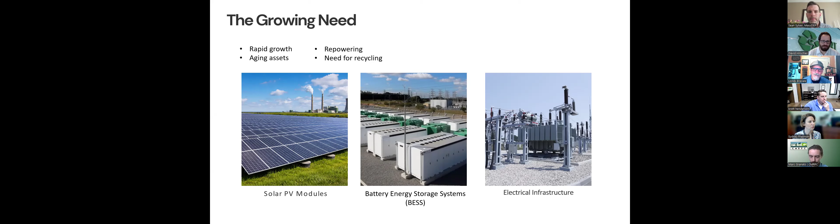Okay, so we do have some challenges with the renewable energy life cycle. Now renewable energy, of course, gets into batteries, wind, solar, the whole bit. But here we're looking at new construction, damaged material, repowers, and decommissioning. The farms do have some maintenance that has to take place, and we get damaged panels from storms, accidents, and that sort of thing. So with the expanding growth of the industry, there's a lot of moving parts. Some are getting upfitted with new, better performing panels, and the other ones, even though they're still working, there could be a home for the ones that are still working.

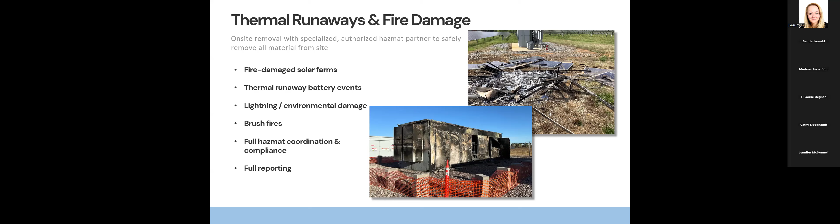So that's one of the things I like to mention, because it's not an everyday occurrence, but when it happens, you have to act quickly. We are in a position where the site owner or whoever's running the maintenance doesn't have to find someone to do it. It's built into the system we already have. So we're handling everything on that site.

We have specialized expertise for not just the panels, but like I say, the damaged goods, the information that we get from the project manager or the site manager. We take this initial intake call. Every site's a little different, and we like to take the overall assessment of what they're trying to accomplish, what's going on there, and if any of these events happen between now and then, we can act promptly, and it works really well - no one's scrambling.

We just act. We have an extensive network for processing too. We have nationwide coverage, also with our partners and downstream partners for the finishing end of some of the material - they have to reprocess it. Nationwide logistics that we handle. One throat to choke - once we get the request in, we handle all of it.

All you got to do is approve the paperwork and we're ready to go. So we'll do the coordination of the material movement, palletizing, banding, wrapping, loading the trucks. We can do everything on the site. In other words, we'll do as much or as little as the site needs. It really depends on what we're doing.

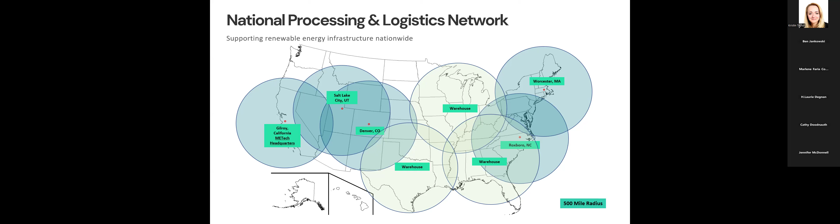So with that, we've got our local trucks that we could use as well. For the larger projects, we like to use the flatbed, so we get that with our partners, but third party. We've got agreements across the country to work with third party logistics if it's not going to be our trucks. And again, any partner we may use, if it's not our own, they have to be vetted out, screened, and approved. So we don't just work with anyone because of our certifications and the things we like to document.

On the solar farm, we recover the materials from the modules themselves, including the glass, aluminum frame, silicon, and any other valuable metals inside those, plus the battery energy storage units. Some are small, some are very large. I did a decent sized job in Texas — the units were about 38,000 pounds each, and we had 19 of them. It's a lot to move. It's a big site.

Inverters, switch gears — electrical control systems — we recover the metal, the plastics, and any other pieces. We separate all the material and break it down to a commodity at that point for reuse once it gets shredded or processed.

Transformers, electrical equipment — again recovering copper, aluminum, steel, and managing any potential fluids that could be in there, like cooling fluids and things like this.

Copper cabling — we want to recover high value copper and all this material, which we base on the market value of the day, which fluctuates as everyone knows. Those credits are due back to that site after we determine what that is, which is kind of cool if you're doing a repower situation. So you have some costs of processing solar panels, but you'll have credits for other goods like copper and equipment with more value. It's good to have a blend of both.

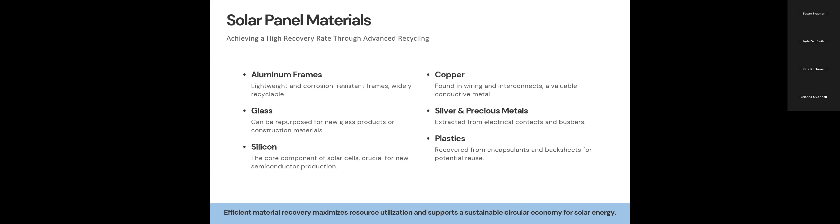So all of it is going to be separated out, and that's part of our processing — all our facilities can do that. Here's kind of a quick breakdown.

We'll do the initial intake and grading of the panels, and a lot of times we'll know this in advance. They'll say, hey, these are all broken, they're cracked, we've got 5,000 of these things, we're just going to get rid of them. Great, now we know exactly what to do. If they're unsure, we will let them know, but in a lot of cases, they are broken.

Once the material is received, each lot gets photographed and weighed, and we document everything from the first foot we're on site to the very end. Everything is documented and recorded. We put it in a portal that you have access to, to watch the process and download all of the documentation that follows it.

So we'll do the grading, dismantling of the aluminum frame, which goes through another process to take the glass and the silicon out. The junction box — all of it gets removed. The glass gets shredded into much more manageable components for more weight.

All those pieces end up getting separated out, and we're looking at the cleanest commodity for recovery. That's using everything — nothing going into a landfill. So everything is going to be reused in some way from that processing breakdown.

Field services — as I mentioned earlier, we will do as much or as little as needed on the site. We could do on-site labor, palletizing, banding, wrapping, using our labor and equipment, loading the flatbeds, and then going to the closest METech facility, or coordinating with current labor that's there. Sometimes we go to a site and there's nobody there — we have access to it and have to do all of it. It just depends on the situation.

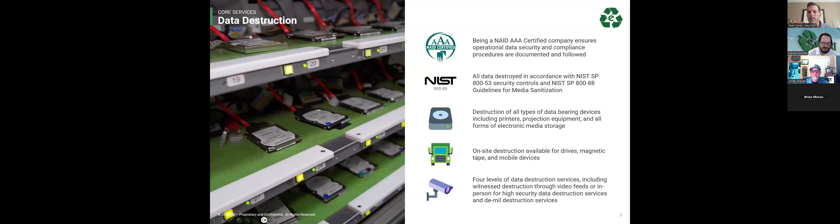So generally what we're doing is ITAD services for devices, batteries, solar panels, as we talked about, and then we're also very heavy in the EPR and ARF space on the legislative compliance side. So data security for hard drives is a big part. I'm just jumping through a background of who we are.

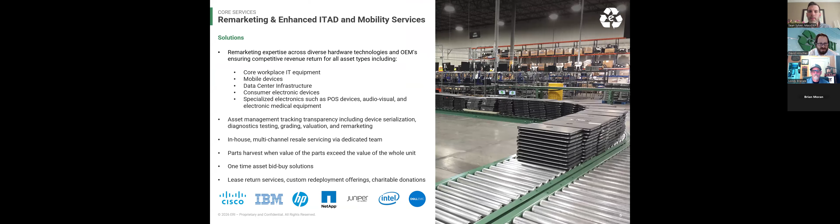This is obviously not the solar panel portion. Here is our reuse testing side of the business, where we're looking for assets to be able to put back out into the market. We do use this area for panel testing as well. As Londi said, there is some potential reuse out there for panels, either they're replaced before their end of life for more efficient versions, or they still have enough power that can be used for alternative services. So we would fully test those devices in our ITAD spaces, and then we are processing material down to commodities as well.

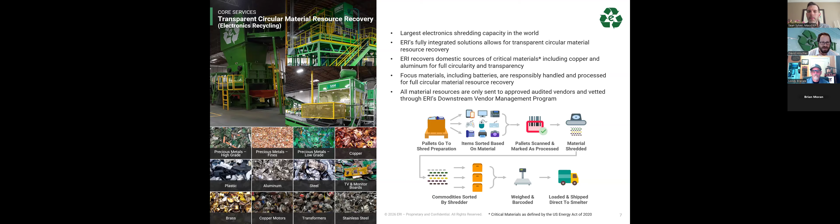So in terms of panels, a lot of this is pretty repetitive. Mostly what we're doing is a lot of the work is on the decommissioning side of things. So unlike smaller electronics, panels tend to be installed. They're very large, and they require a lot of manual disassembly. And so most of our panel work is going to include that decommission side of things, and then the moving of these large materials to our facilities.

Also, a similar reporting system. We want to make sure that everything that comes in and out of our doors from customers is reported and tracked and available for everybody as well. And then we have custom reports down to the asset level as well on that end.

So with solar panels, as I talked about, we're pretty heavily involved in EPR and other regulations. There has been a bit of a push to grow EPR for solar panels with limited success. The industry has been pretty adamantly opposed to solar panel EPR, and therefore have sort of threatened to leave states that have EPR in place. So in Washington State, for example, they have the first full EPR program, and that continues to get delayed.

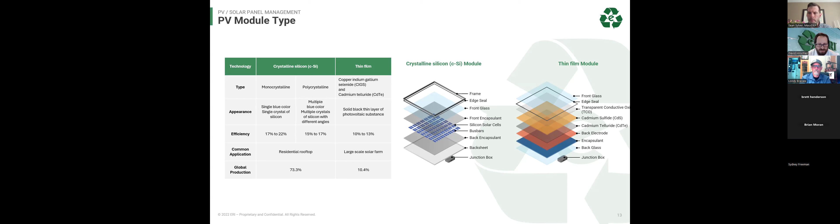It's now the cheapest way to install new energy. So when we talk about the end of life of panels, there are a few sources. One is simply that these materials are reaching end of life. The other is that there's about a 10% breakage rate with new installations, and that seems to be growing because the panels are getting larger and thinner, making them more brittle and increasing the risk of breakage.

So we're seeing both older panels as well as a lot of newer panels coming through the door as well.

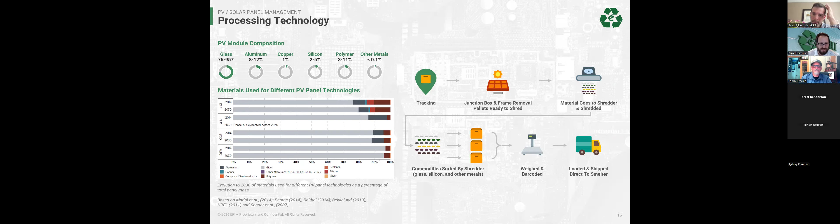Again, mostly what we're doing is on-site, supporting the actual movement of the material. That's going to be by far the biggest cost and challenge, since these are very bulky, custom-sized items. Because there's good reuse value for some of these items, we want to make sure they're packaged safely. They're also much easier to process when there's no breakage, so that's a key part of the process.

As Londi said, we're handling everything, not just the panels themselves, but the junction boxes, the ESS storage, etc. All of that is handled separately and then processed, with the aluminum and the silicon wafer being the most important areas there.

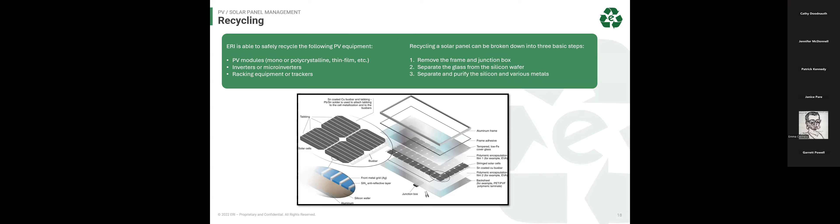Tracking individual panels by make and model for potential resale is a big portion of what we're trying to do. There are markets out there, though not always domestic, so there's a need to make sure we're properly testing those panels to confirm they're fully functional before they leave.

The goal is, in places where a manufacturer is working with us to eliminate their old excess panels, or other areas where panels are essentially good as new, we're trying to track the individual make, model, and serial number, and fully test those devices so we can make sure they're functional.

Just based on some of the questions in the chat before, I want to talk about glass processing. As I said, the glass is the biggest challenge with panels. We're in conversations with a few different manufacturers trying to develop glass-to-glass recycling, because most of the glass is currently going into the construction industry.

There's some antimony and other additives in the glass that make it impractical to use similar processes to bottle recycling. But if we can get the panel glass in good enough shape, not broken, there are manufacturers starting to evaluate processes and products for glass-to-glass remanufacturing. That's been a big push lately, and we've been working with some national labs to figure out better solutions for that.

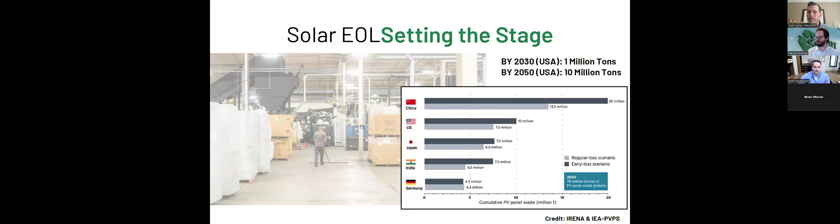So, solar end of life, setting the stage here. IRENA stated, in a report that's a few years old, that by 2030 there'll be about 1 million tons of solar panels hitting end of life in the US, and by 2050 that will turn to 10 million tons. We actually estimate at SPR that those numbers will be slightly bigger. What we've seen entering our recycling facilities in Texas, North Carolina, and Georgia are panels that are roughly at an 11-year life cycle. There's really 4 buckets that modules will hit end of life.

First and foremost, most manufacturers have a 25 to 30-year expected panel life, which many very well could reach. But what speeds that up is a repower or tech upgrade, similar to if your IT department is going to issue new laptops throughout the business, even though those old laptops are working, there's a need for a tech upgrade. So what we're seeing is a lot of early generation farms might only have about 200-watt panels installed. Now you could go to market and get 6, 7, and even 800-watt panels at a 4 times multiplier. So it ultimately pencils out to do this refresh.

You have weather events that could have a panel go from 1 year anywhere to 30. That weather event could occur. We've handled quite a bit of weather events. Unfortunately, Hurricane Helene spawned quite a bit of tornadoes in the southeast, which we've done a good bit of cleanups from. You'll also just see regular events such as a hailstorm or even a windstorm that could actually bow the panels, allowing these to hit end of life early.

And then obviously you have your transportation and construction breakage. Similar to if you were to install new tiles in your kitchen, you're always expected to buy just a little bit more because there'll be some breakage in transportation of these solar panels and breakage as they're being constructed.

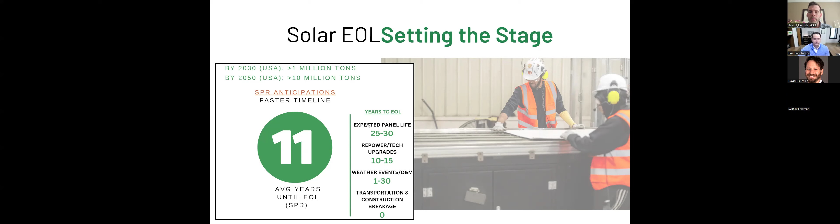Decom and repowers was a small percentage of that in our early years. Weather events and O&M breakage is the other part that rounds it out. I did forget that other bucket on the previous slide - operations and maintenance breakage. There's all sorts of events that could cause a panel to hit end of life while it's operating. Things such as a junction box failing, something quite literally falling out of the sky. We've had those events - when they're mowing a solar farm, rocks could hit up. So there's just a laundry list of reasons why a panel could break while it's in operation.

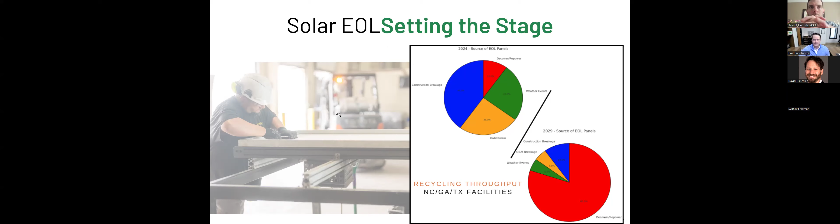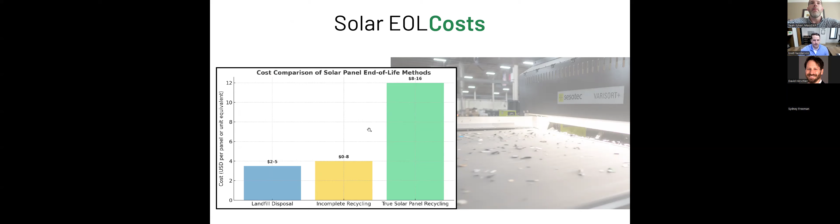So, cost: landfill disposal, depending on the region and market you're in, that could be a little bit higher, maybe even slightly lower, depending on local landfill cost, but roughly $2 to $5. Incomplete recycling, which we'll talk about in a little bit, could be anywhere from $0, where someone's willing to just take the panels for free, up to $8. And then true solar panel recycling, which is the sustainable method of handling volume, scale, and regulations, is roughly $8 to $16 a panel. That's including transportation.

What we've seen here at SPR in the last 36 months, our costs to our nationwide client base have decreased roughly about 42%. There's a myriad of reasons for that. First and foremost is technology advances.

What that could do is not only speed up the solar panel recycling process, but it'll also help recover cleaner commodities, which opens up new markets and new supply chains. We'll talk supply chain a little bit at the tail end of this presentation.

Your economies of scale are still something that's quite realized in this industry. When you have consistent throughput, that helps open up different off-takers and consumers of your recycled material when they know they have a consistent supply.

And then the largest cost really in this whole solar panel recycling side is going to be transportation. So regional facilities that are actually processing panels on site offer much lower transportation costs from solar site to recycler. We've seen in the industry a lot of lay down yards or just storage warehouses, but that transportation still has to ultimately end up to a recycling facility where they're being recycled. So the more you could shorten that distance, not only is there major CO2 savings, but those same costs to get those 1 million panels on the solar site also have those same costs of freight to come off site.

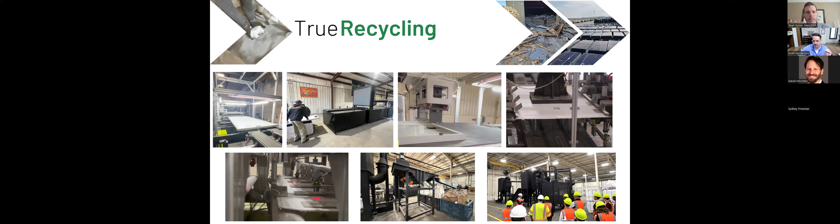On the mechanical side of things, the glass will be shaved off without actually breaking the encapsulant and grabbing the silicon. We do on-site sizing, crushing, and reducing and screening, so it could go into a myriad of different glass markets. In the back end, we are using technology such as electrostatic technology to pull out the copper granule and other metals, as well as density separation to pull out silicon and plastics.

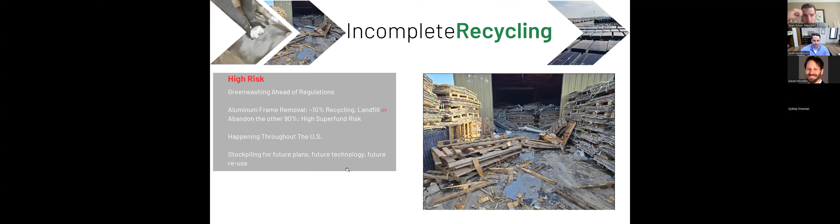Reuse markets. So again, there is reuse markets. We've recycled a million plus panels. Probably a few thousand of those have entered reuse markets, but they're quite limited. We have a white paper, our circularity analysis wrote it. If anyone wants to reach out, we could share it with you.

On the issues of taking solar panels in volume and putting them back into the grid, not only in the United States, but abroad, there's a lot of interconnectivity legislation on a used panel. So for example, in the US, once that panel's used, the UL rating is no longer valid. So it's going to be quite challenging to connect to the grid without that type of validation.

There's also all sorts of issues that go into doing this in bulk. It slows down the installation quite a bit. They have to be protected. More packaging materials are needed. Testing is very in-depth. We have to do flash testing, micro and fracture testing, and high voltage leakage testing.

So what we're seeing, unfortunately, is a lot of overseas dumping that we saw early in the e-waste industry, where someone could load up full containers of panels, send it overseas, and then they're ultimately trying to get that value in aluminum, with the rest ultimately being landfilled.

So the composition of the panels kind of gives you that perfect recipe that we saw on CRT monitors several decades ago. The bulk of it's glass. A single-sided panel could be 65 to 75% glass. A bifacial panel is typically around 80% glass. Then you have aluminum, silicon, and plastic.

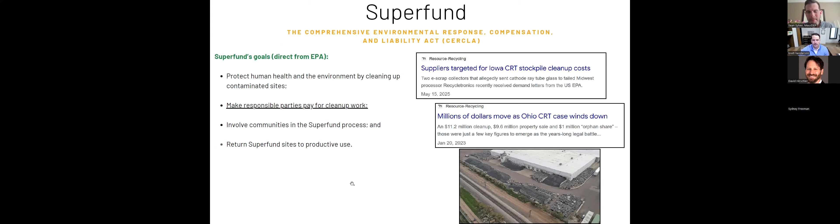And again, it is all about the glass. This is ultimately a glass recycling game, so it's highly technical and requires established relationships. For example, one of our biggest glass off-takers, it took several months of lab testing back and forth, contracting on and getting the exact size that could be used. When they bring it in, they have to do different EPA and air testing.

So there's quite a bit that goes on before that manufacturer is ready to consume it. And a lot want to be a little bit cautious of taking a recycled material until they know there's a consistent supply of it. So it's a little bit of putting the cart before the horse here.

Also, glass going back into solar glass. Abroad, this is something that's already currently happening. The technology is there, it's quite useful, and there's a few reasons for that abroad. One is a lot of the manufacturers are co-located near recyclers in other countries. Secondly, rail is quite available in other countries, and thirdly, it's not as large of a geographical footprint.

But the biggest challenge in the U.S. is that U.S. glass manufacturers use a process called float glass, which is higher quality glass produced, but more importantly, way less energy intensive, which means costs are much lower. But most solar panel glass, even if it's put together in the United States, is manufactured in Asia, and it contains antimony. And antimony cannot be used in float glass processes.